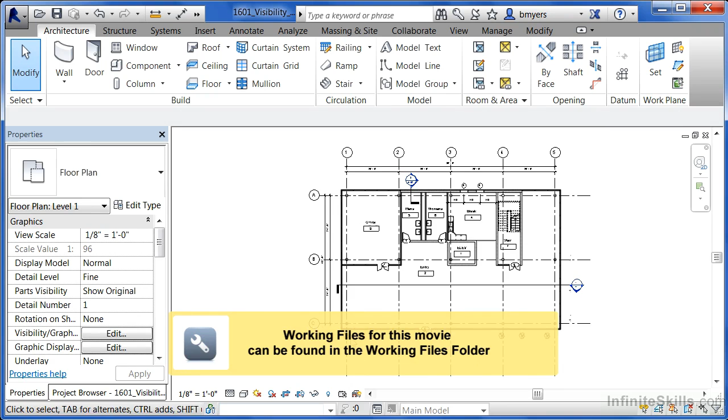The visibility graphics overrides in a project change the way that an object displays in a specific view. Different kinds of curtain walls have different line thicknesses, whether associated with mullions or panels. If we zoom back out, even our walls have different line thicknesses, while the pattern on the inside is a thinner line weight.

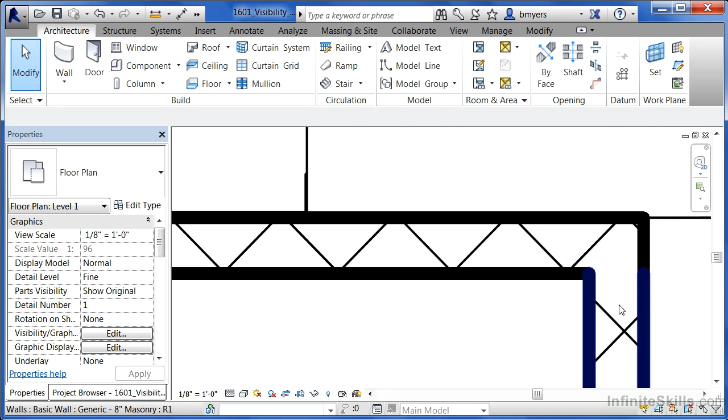Certain objects in Revit can actually have colors like blue, green, and red. You can give it any color that you want, so these do not have to be limited to just black like we've seen up to this point. Visibility graphics can assign those colors as well.

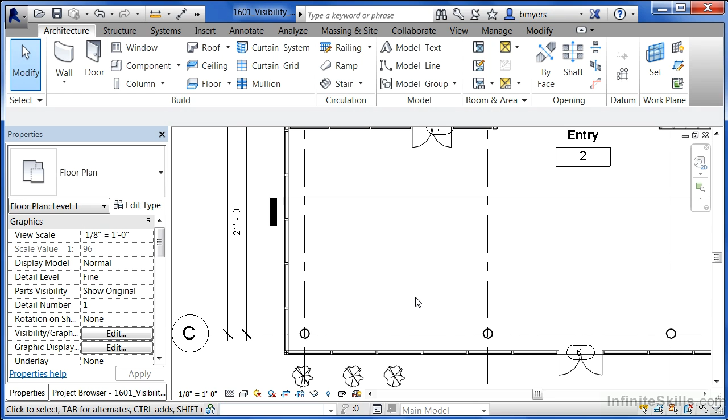Also, where we see the structural grids, this line style can be adjusted from being a center line to a hidden line to a solid line through the visibility graphics and the properties underneath the visibility graphics for this type of object. Visibility graphics also control whether or not an object is on or off.

So if you wanted to turn the dimensions off, or if you wanted to turn all of your walls off, you could do that through your visibility graphics.

Those visibility graphics settings can be accessed one of two different ways. You can type the letter V twice on the keyboard to bring up the visibility graphics dialog. The other way is underneath the properties of the view, select the edit button next to visibility graphics, and it brings up this visibility graphics overrides dialog box.

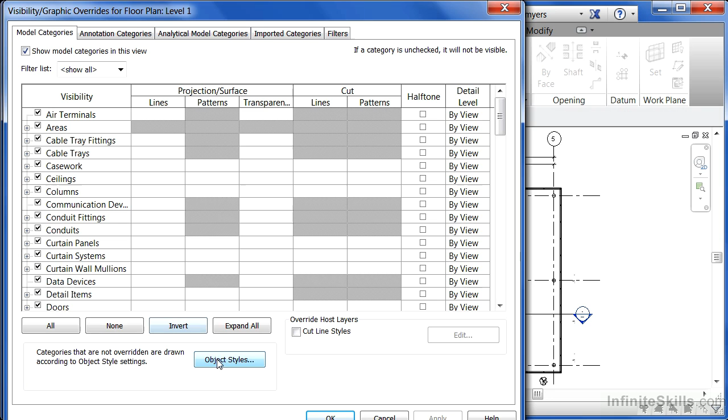It's called visibility graphics overrides because it overrides the default settings just in this one view. If you want to change those settings throughout every view in your project, you can do that by selecting Object Styles. In the object styles, we can see such things as doors, walls, windows. Really, just about every object inside of Revit will show up here underneath the object styles.

In this case, if we take a look at walls, we can see that a line weight of 2, which is a very light line weight, is associated with these walls whenever they're in a projection view. Now, a projection view is usually associated with elevations. So if you're looking at it straight on, that's a projection view.

A line weight of 5, which is a much darker line weight, is associated when you cut through a wall. Cutting through a wall would happen in floor plan views because you're cutting through the floor plan through the walls at a certain elevation. Cutting through the wall would also take place inside of wall sections. So in wall sections and floor plan views, the walls are going to be darker, but if we're just looking at it in elevation, the walls are going to be lighter.

The reason why the walls look the certain color that they do is because of the line color associated with those walls. We'll also see that there's a line pattern - this is dash, solid, hidden. And if we click inside of this dialog, we can see a pull-down of all the different line styles that are available to us.

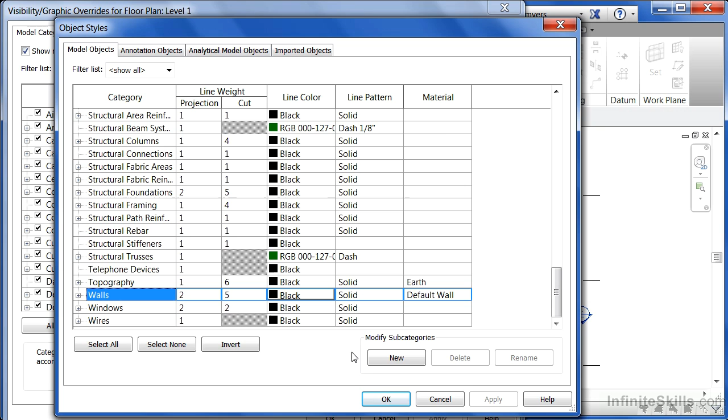Now, this is the project-wide settings, and if nothing gets changed in the visibility graphics overrides, this is how the walls will display in every view in the project. Now I'm going to click OK to that. But if in the visibility graphics overrides we said, in this view in the project we want the walls to display different, we could do that.

Scroll down to the walls, highlight where the category of wall is at, and when you do, you'll see override boxes in each of these locations. For instance, underneath cut, this is where the wall section or the floor plan view would take place. I'm going to select on overrides in the walls line. From here, I could override the line weight with any line weight that I wanted.

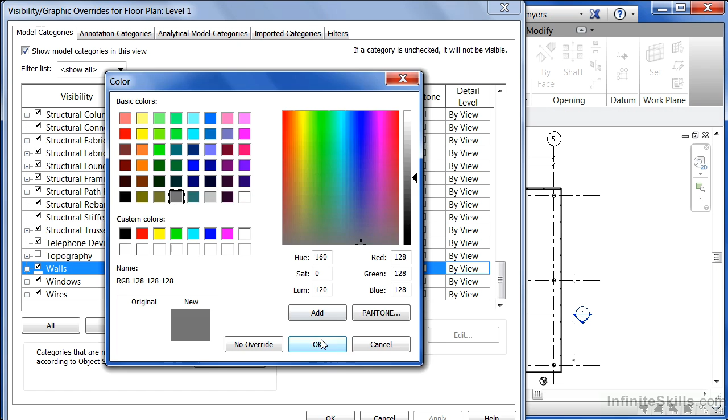I can make the color of the walls change, so I can make all my walls red or blue or green. I could change the pattern so that all my walls look differently - they wouldn't even be solid lines, they could be dash lines or hidden lines. Those settings can all be changed through here.

And if you've changed them and then you want to come back and just wipe out any of those changes, you can always click on the clear overrides box to get rid of any of the changes that you've made. In this case, I haven't really done anything, so I can either click on cancel or OK to this.

Actually, it looks like I'd selected on one of the line types, so it's showing up as the walls having a solid line type here. In fact, if I'd said red or dashed or any other properties, we'd be able to see that in this preview box right here for this particular override.

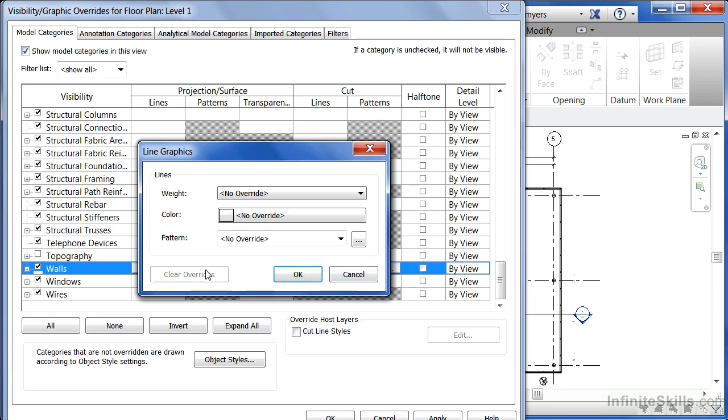In this case, though, I want to set it back, so I'm going to click back on the box, and I'm going to say Clear Overrides, and click OK. And now we can see that that override has been cleared out, and it just says Override again.

Also, if I come over here and click the box right next to walls and clear out that check mark, and then come down to OK, we'll see that all the walls will now disappear in the project. Probably not what we want, but it gets the point across that if you click the checkbox next to that particular category, then if it's cleared out, those objects will disappear. But if there is a check in it, they'll show back up again.

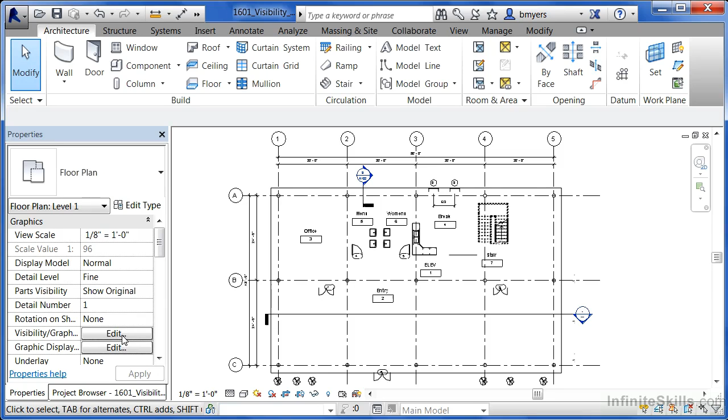And we can see that if we go back into the visibility graphics and then put a check back next to the walls category, and click OK.

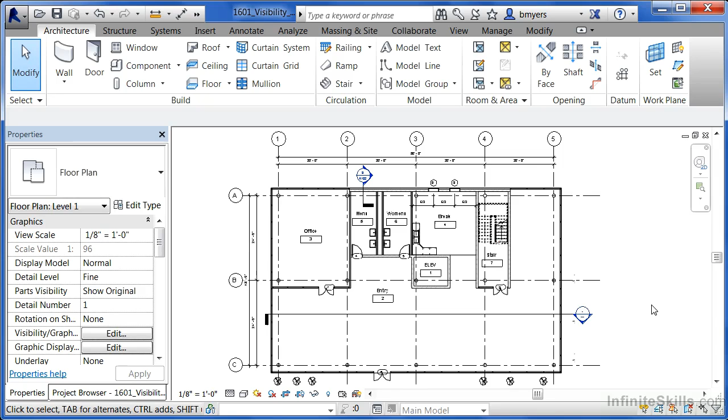So the visibility graphics overrides affect the way that each individual view displays. The object styles affect the way that objects display across the project, but the visibility graphics overrides will affect the way that those objects display in this specific view.